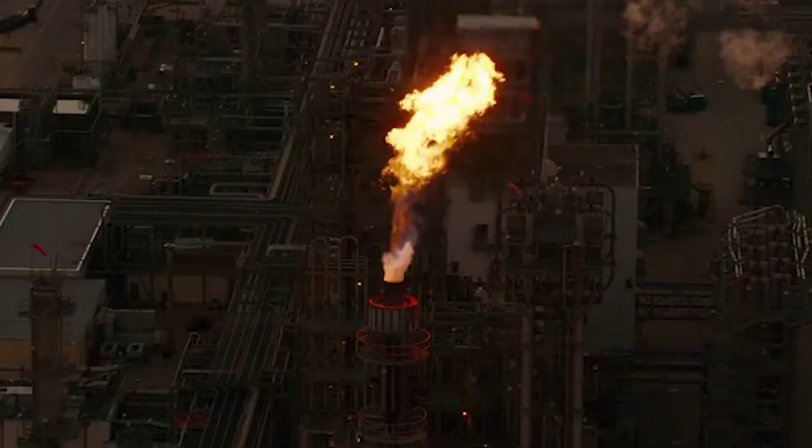In 2018 alone, 359 million tons of plastic was produced. It is estimated that each year 8 million metric tons of plastic enters the oceans. This annual accumulation has resulted in 5 gyres, or islands of plastic, in the Earth's oceans. The largest of these is the Great Pacific Garbage Patch, which covers an area of 1.6 million square kilometers and is estimated to weigh 80,000 tons.

This plastic in the ocean poses a variety of risks to ecosystems and species. Entanglement and ingestion kill thousands of marine animals each year. However, the breakdown of this plastic poses a greater risk, with the biomagnification of micro and nanoplastics through the food chain. It is estimated that 8% of the Pacific Garbage Patch is microplastic, and this number is quickly increasing as particles continue to break down, placing greater urgency on getting the plastic out of the ocean.

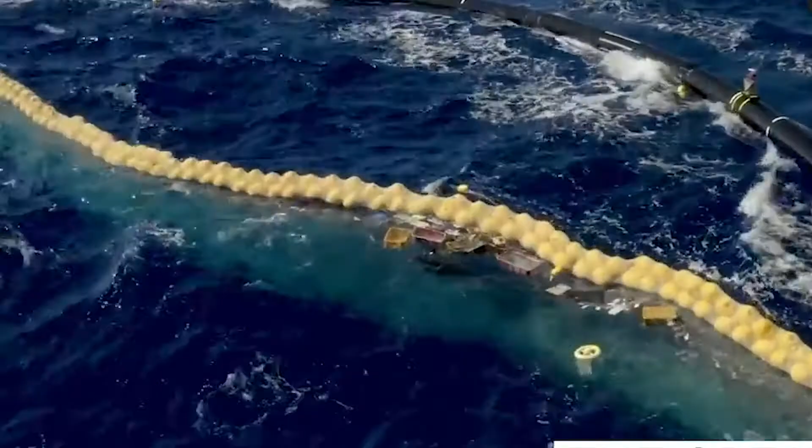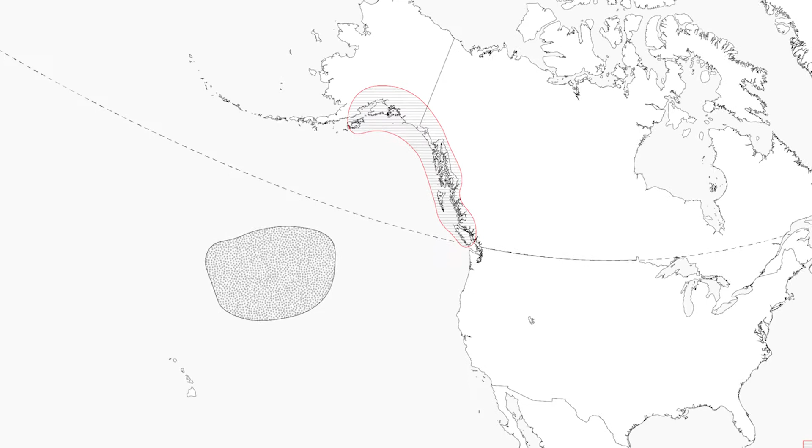Currently, major initiatives exist around the world. However, most of the garbage collected in the past decades has been directed to landfills because of limited recycling infrastructure and technology. This project focuses on applications specific to remote Pacific Northwest coastal communities.

Guided by ecological and indigenous values, this project intends to build restorative relationships with the natural environment and develop design interventions and fabrication strategies that consider the well-being of remote indigenous communities. Building off existing initiatives, this project attempts to provide opportunities to better recognize the true value of ocean plastic and explore ways it can be utilized in a local architectural application.

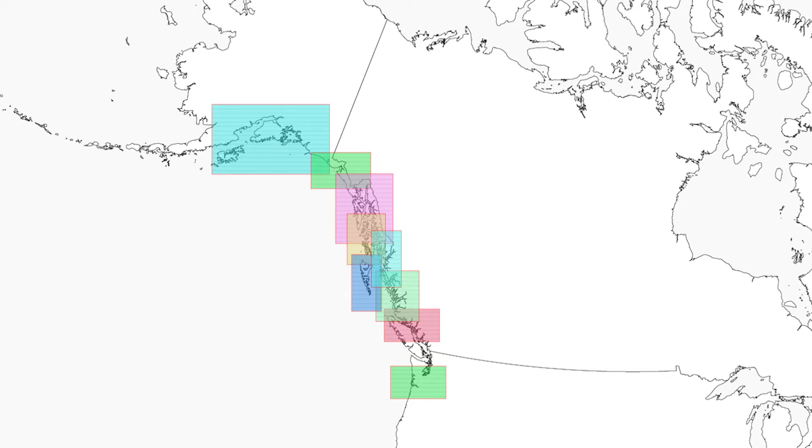Remote coastal communities along the Pacific Northwest are generally sea-locked communities with populations ranging between 250 and 15,000 people. Many indigenous nations inhabit areas of the coast and have for thousands of years. Harvesting from the ocean and forests is common practice for coastal residents, making food security very susceptible to ecosystem collapse. Therefore, these communities have an invested interest in collecting ocean plastic and maintain an ethos of ecological stewardship.

Validating the composition of ocean plastic was done through conversations with individuals actively involved in coastal garbage collection and published surveys completed by the Ocean Cleanup. Based on this research, a range of commonly found ocean plastics was determined. Commercial fishing equipment comprised of hard plastic floats, baskets, nets, and rope, and polyethylene foam blocks make up an estimated 46% of the plastic in the garbage patch.

Building off of existing opportunities and assets in coastal communities, a collection process has been outlined. As a result of crashing fish stocks and the outsourcing of Canadian fish processing to China, several canneries and fish processing plants have been indefinitely closed. As well, industrial-sized fishing boats with carrying capacity above 100,000 pounds are highly underutilized on the coast. In addition, smaller vessels and helicopter-based infrastructure also exist.

In the first scenario, plastic would be collected along the shoreline by local community members. This plastic would then be placed in large reusable nets and transferred to large barges via helicopter or marine vessel, depending on the geographic location.

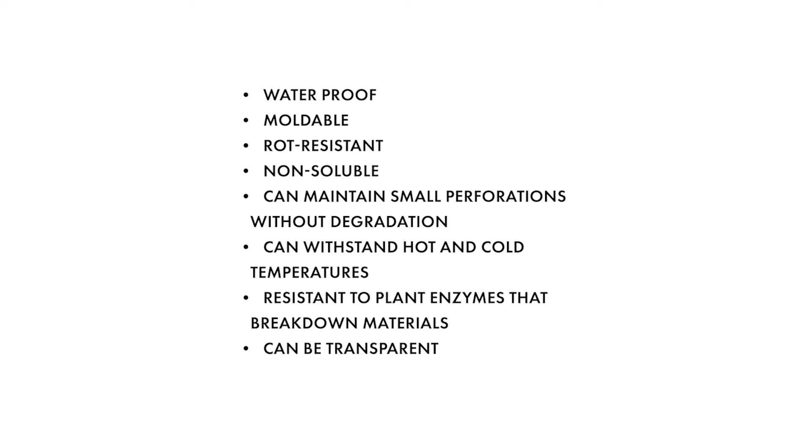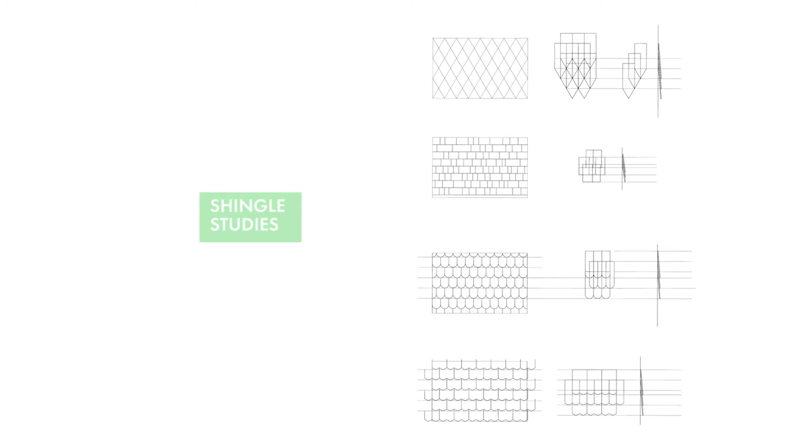Considering the general affordances of plastic led to the exploration of generating an exterior wall treatment. West Coast building exteriors must respond to driving wind and rain, salty air, and an extremely humid climate. Wood-clad buildings often have major buildup of mosses and lichen. Of the plastics found in the ocean, high-density polyethylene has been selected as a viable resin to explore based on researched and tested characteristics.

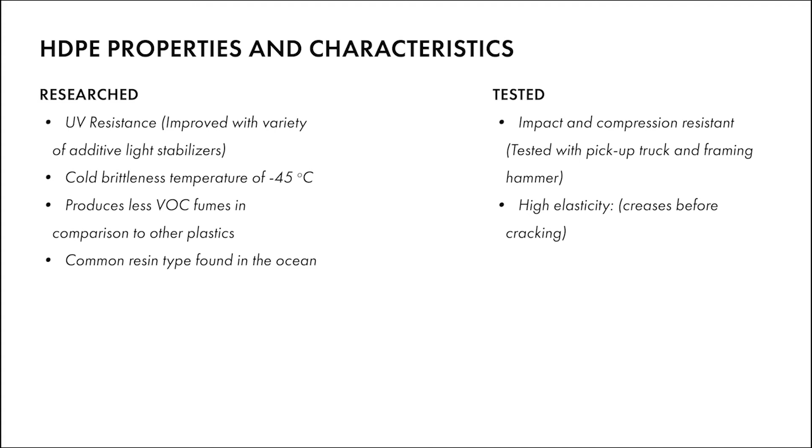Dozens of samples have been generated using heat molds in a small toaster oven. Through this process, different combinations have generated samples that explore the variables of melting these different plastics.

Interesting transparency opportunities have been seen with high-density polyethylene plastic samples, as well as opportunities with the integration of other common ocean plastics such as netting or rope. Even the integration of shells collected on ocean plastic has been tested in samples.

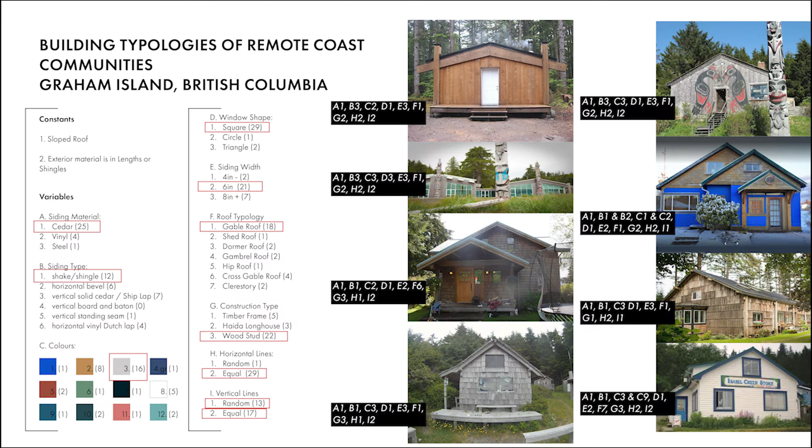A building typology study was completed from a series of buildings on Haida Gwaii. Constants and variables were analyzed, resulting in the determination that western red cedar is a common exterior cladding material in the form of a shingle or a shake.

This exploration has informed the development of a recycled ocean plastic wall shingle for coastal environments. This typology study informed the dimensions and variations of the proposed shingle strategy.

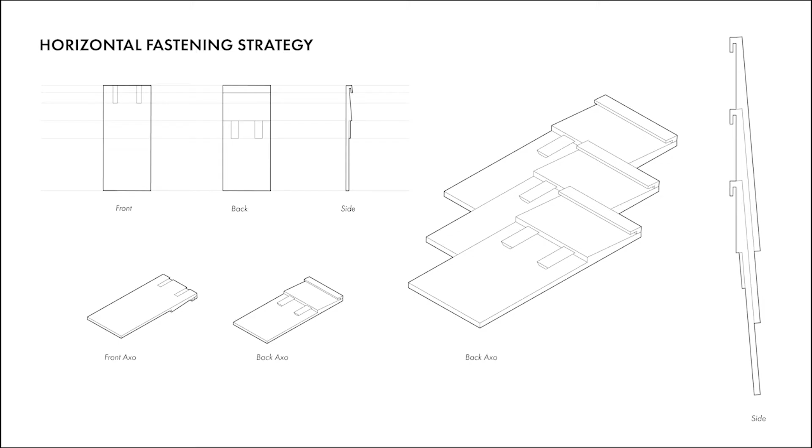Fastening strategies have been based on the use of horizontal cables or strapping-like members attached to structure to mount the shingles to. A range of interlocking variations have been explored, offering weather-resilient exterior with some fastener-less installation options.

One strategy slides vertically into the shingle below, while another slides horizontally into the shingle below. After testing these fastening strategies on the physical models, pros and cons of each were determined.

The digital explorations have uncovered the parametric variation opportunities that this wall shingle strategy can employ. The width and length of the shingles can be varied, as well as the color and transparency based upon the recycled plastic used or added pigments.

One of the goals of this digital exploration was to develop an efficient method of deploying the shingle strategy on any wall surface. This was achieved through the use of the digital tools Rhino and Grasshopper, where a script was generated to analyze any surface, curved or flat.

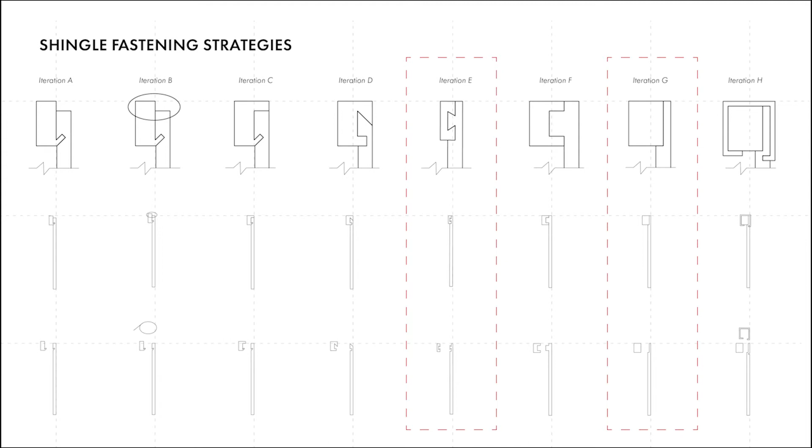Additional fastening strategies have been analyzed in an effort to generate the most seamless and efficient installation. The basic pseudocode driving the parametric variation divides the surface into horizontal lines, where these lines are then broken up into random or even divisions.

The shingle is built from these line divisions into interlocking formations. Variations can then be deployed to this array, which vary shingle length, color, and transparency. These parametric variations can be deployed in subtle or extreme extents depending on the design intent.

Additional explorations have gone into the fabrication capabilities of high-density polyethylene plastic. Beyond being moldable with heat, plastic samples have been tested with table and miter saw, drill, and the CNC. Each test produced satisfactory results that could be deployed in a fabrication process.

Using adaptable molds, plastic could be melted into adjustable width and length dimensions, as well as curve requirements of the proposed surface. This would enable a mass customization process that could be shifted to many different project requirements.

Through post-digital design, the potential outcomes and boundaries of this strategy can be explored and implemented in a contextual, virtual space. This has provided a better understanding of what is possible, what should be avoided, and greater insight into future iterations of the plastic wall shingle research.

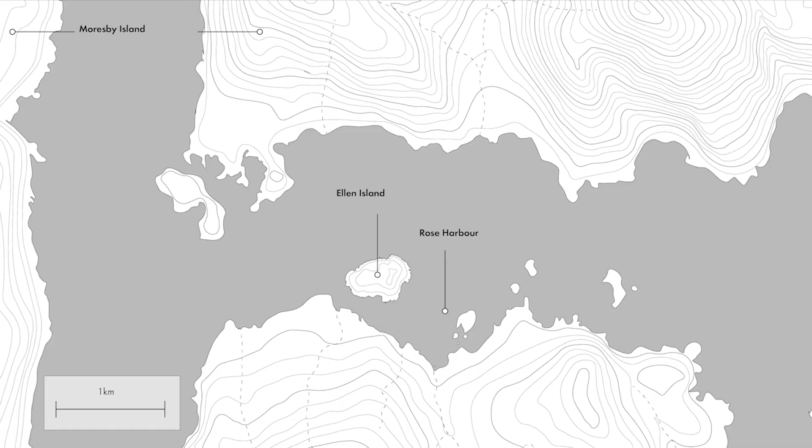The proposed building is sited on Ellen Island, which is a small island in Rose Harbour at the south end of Haida Gwaii. This island is currently used for Parks Canada staff accommodation.

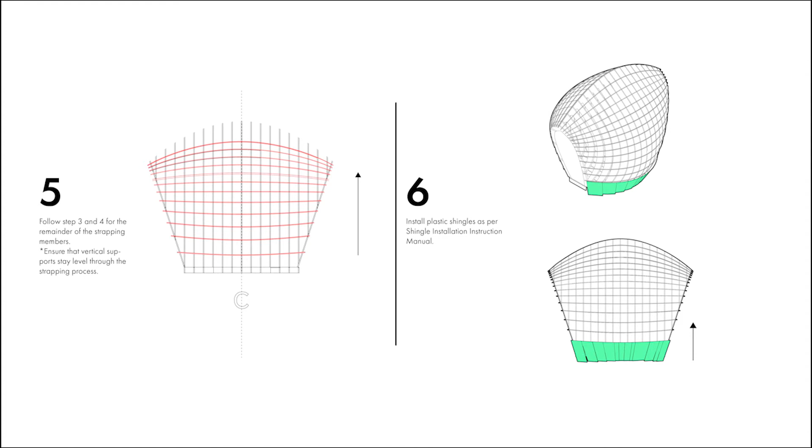This structure is intended to perform similarly to a canvas tent, meaning no defined air barriers exist, allowing fresh air to circulate while rain and wind are kept out.

The structure respects the land, as the foundation of the structure does not contact the forest floor in an attempt to create the least amount of environmental disturbance possible.

The building can be used as research buildings or private staff accommodation. Shingles and frame can be assembled and disassembled seasonally or moved to separate locations as required.

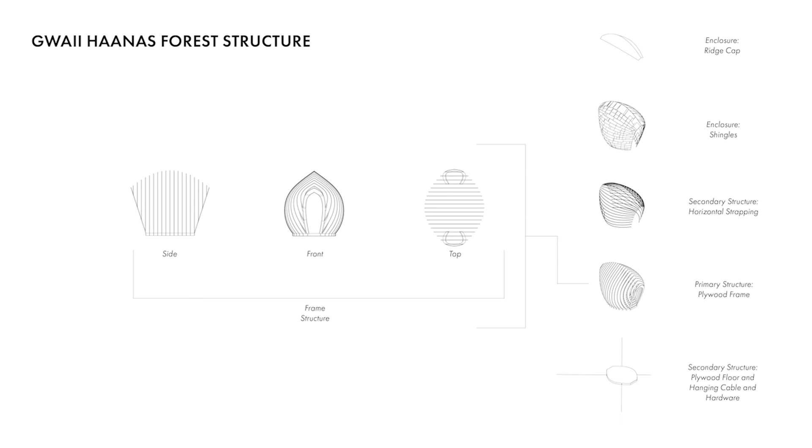The final artifact was constructed of recycled plastic and recycled building materials. Each shingle was baked using processes perfected over the course of this exploration. Each shingle holds a unique composition of collected plastic debris.

The structure allows some light transmission while keeping the space totally private. The interior is reminiscent of a stained glass collage telling stories from the sea.

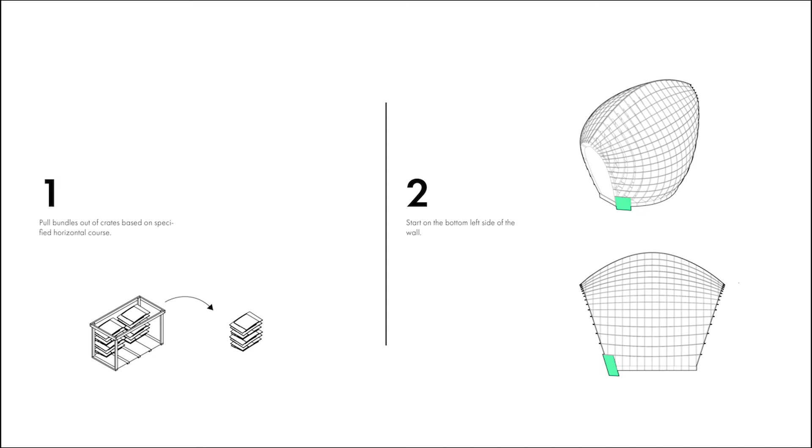High-grade cedar shakes require old-growth western red cedar in the Pacific Northwest. As these material sources dwindle and remaining old-growth forests are considered for protection, the plastic shingle offers a weather-resilient alternative that does not rot under humid conditions or crack when applied to a curved surface.

This project attempts to shift the paradigm around exterior facade materiality, where ocean plastic waste can be diverted from the ocean and landfills and seen as a valuable product because of its material characteristics and embodied ethos of ecological repair of the Earth's oceans and indirect preservation of old-growth timber.

This plastic embodies its own story of decades at sea, and each formed object maintains unique characteristics. There is also direct connection developed between the communities collecting this plastic and utilizing it. This project considers new ways of utilizing byproducts of the Anthropocene and harnessing it in ways that are ecologically regenerative, which in turn enables remote communities to continue to thrive.